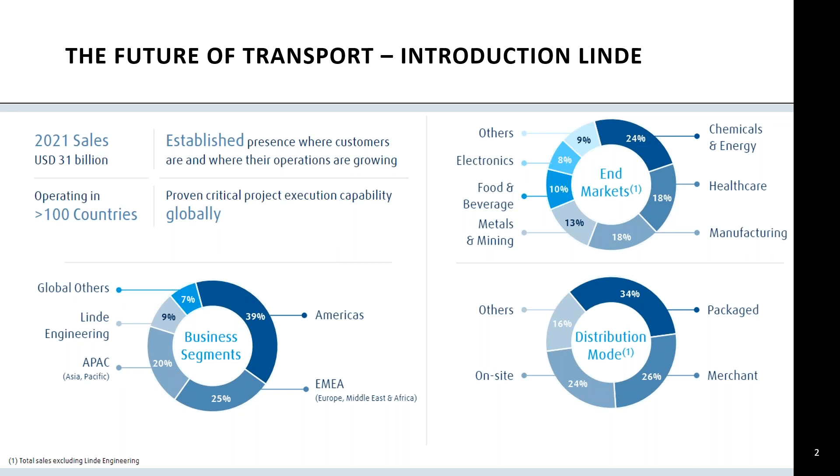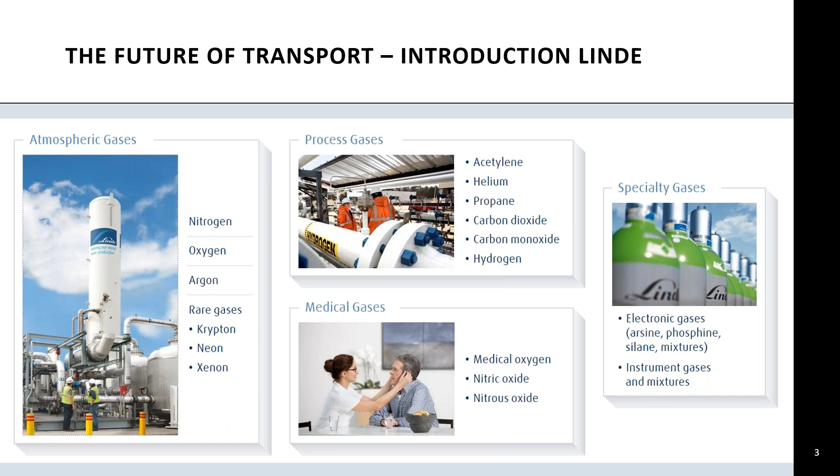Good morning, everyone. Very fast introduction for Nitrex. Nitrex really started as a company specialized in automation technology, mostly creating control systems.

Today, the company has evolved. It has three main divisions. The first is called HTS, a commercial heat treating service with plants located worldwide, including the US, Mexico, Brazil, China, and parts of Europe. Then you have the main core of the company, called NTS, specialized in heat treating technology and equipment. This part builds control systems and furnaces, including nitrocarburizing furnaces, nitriding furnaces, and vacuum furnaces, with an emphasis on providing recipes and technological help and support to our customers.

Finally, there is the instrumentation branch of the company called UPC Marathon today, which specializes in OEM supplies, including flow meters, oxygen probes for carburizing, gas analyzers for nitriding and other applications, gas mixers, gas generation, as well as automation software for applications such as lights-out plants.

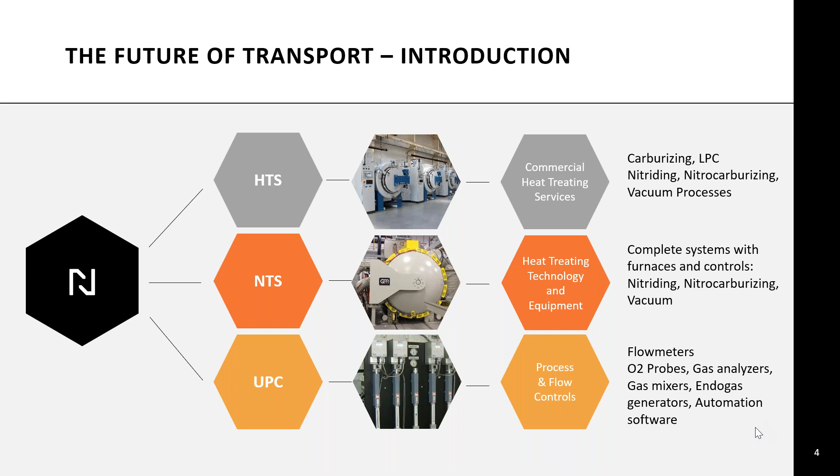The section that Linde will talk about is the other processes beyond heat treatment, and this applies mainly to electric vehicles and the change in the industry.

Finally, I will talk about particle emission reduction, a case that is something brand new and has surged in the past few years. I'll expand on this later. It's one of the great case studies that illustrates how the industry is changing today. And finally, Linde will talk about the need for precise gas process control and high quality gases in heat treatment and other industries.

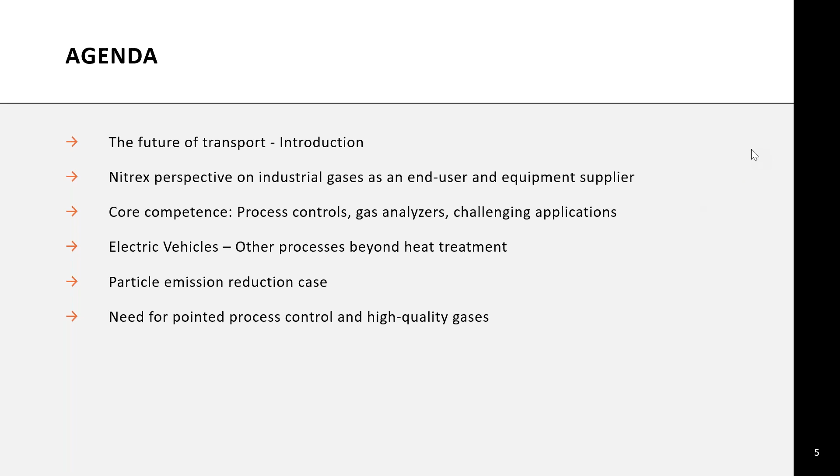So you've probably seen, in the business of heat treatment or transportation, that in recent years internal combustion engines have had a rougher time and have been eliminated, or will be eliminated in some parts of the world, including Europe, by probably 2030. We always think this will eliminate some of the processes. It definitely will, but there are also many new opportunities rising with the transportation industry evolution.

So there are two key trends: electrification and connectivity. Connectivity has more to do with smart cars, self-driving systems, and so on, and these apply to different forms of transportation. But electrification is one of the main factors we are seeing as a heat treater and gas supplier.

What is driving those trends is mainly policy changes, which have to do with the reduction of pollution and impact on our environment, mostly driven by meetings such as COP, which has just taken place, and different new legislations covering Europe as well as North America.

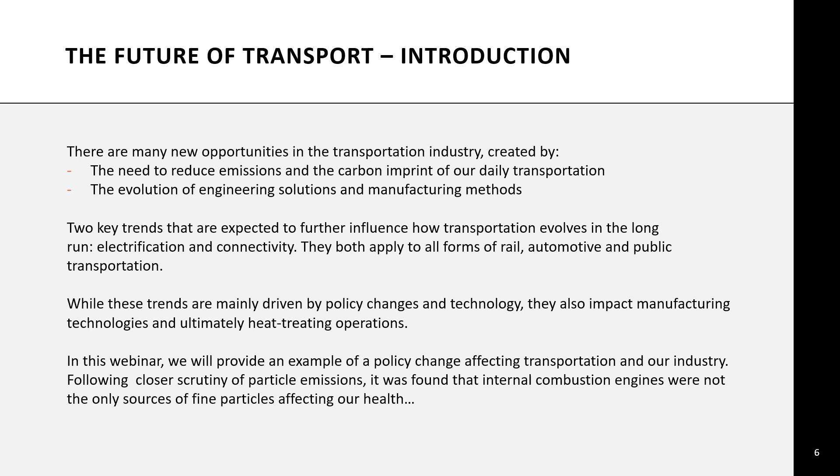I'll describe very shortly and succinctly our perspective on industrial gases as an end user and equipment supplier.

So it's a bit misleading when we talk about heat treating in general. Most of the processes are not really just heat treating processes. High value added processes are usually better described as thermochemical processes. This applies to nitriding and nitrocarburizing, as well as carburizing and low pressure carburizing. Finally, in vacuum heat treatment, yes, you do have classical heat treatment, but also other coatings being applied. So it's really a vast world that has to do with, yes, heat treatment, but also thermochemical treatments.

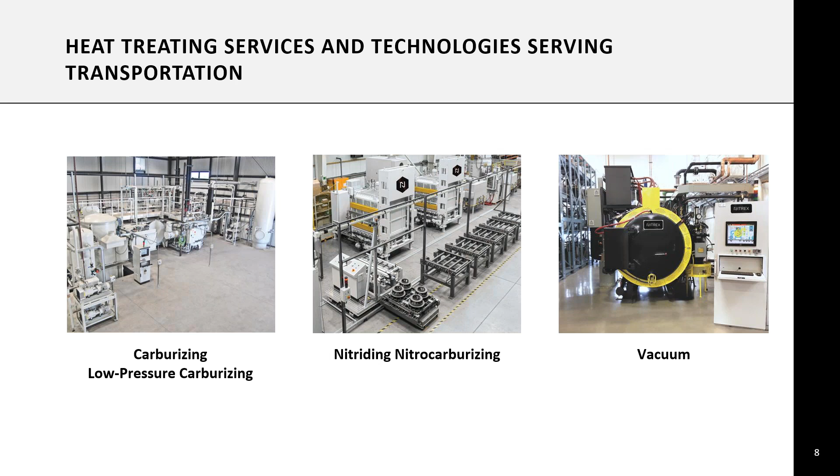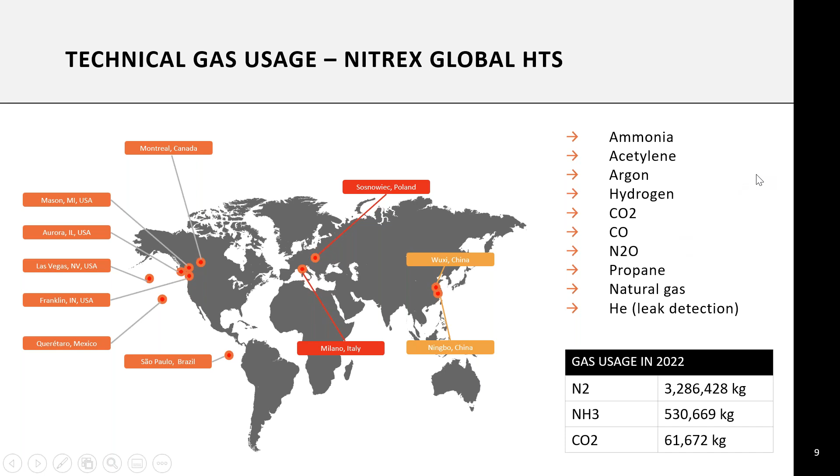What we have seen in the most recent evolution in the transportation industry has a huge impact on demand. One of the factors driving this demand is new changes in purchasing patterns and the replacement of combustion vehicles by electric or hybrid vehicles, which have basically the same needs.

Nitrocarburizing is used a lot for components such as brake components and chassis components, because it's a process specialized in sliding wear and anti-corrosion, among others. So the volumes have been increasing, which calls for completely different solutions. Most nitrocarburizing processes are relatively short, lasting between less than 3 hours and perhaps over 6 hours. This means big pit furnaces are not very practical, because your heating and cooling time requires a long time due to the volume and weight, while the process itself is relatively short. Therefore, we are evolving towards equipment which is either continuous or semi-continuous to provide solutions for this kind of demand.

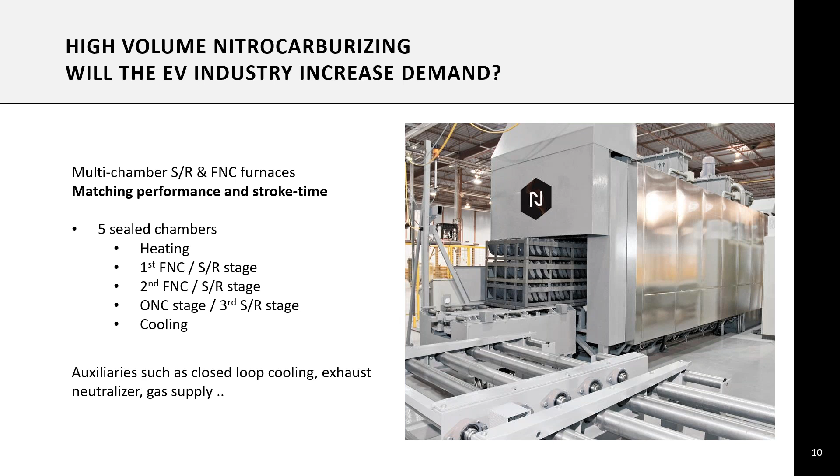The other aspect of our business is also heat treatment of aircraft engine parts. So it is an evolution. We are thinking, of course, of evolving vehicles such as electric cars and so on, but it is very surprising that new engines, those turbofans we are seeing right now, with the improvements in the blades and the types of compression they can achieve, have an extremely good mileage. If we go to the next slide, we'll see some of the components.

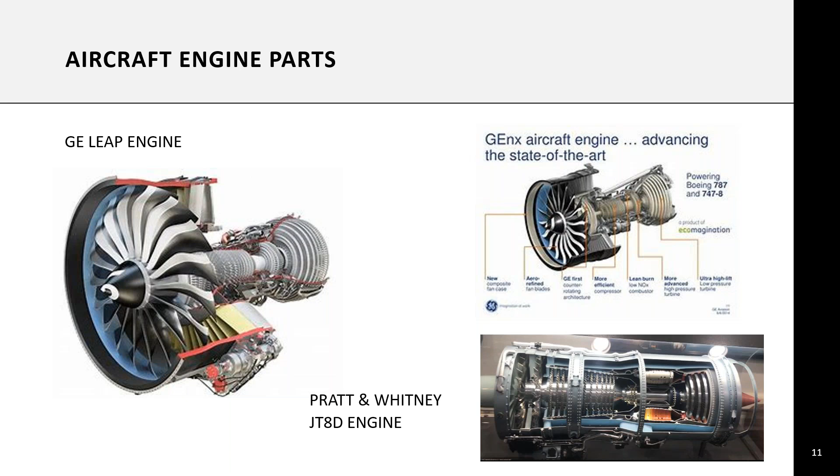Those are called single crystal blades and vanes, and they are used in the hot part of the engine. The cold part that we see as passengers on an airplane is usually a composite with the leading edge made with materials such as titanium. But inside the engine, you have this type of vanes and blades, which allow higher compression ratios and very hard working environments. The processes used are usually vaporized aluminide coatings. This is used also in military airplanes.

As a passenger taking an airplane, you have a carbon signature. Newer engines have an extremely low carbon signature. Of course it's the quantity of flights that counts, but as a passenger you get roughly 90 miles per gallon. This is astounding when you think of the sheer quantity of fuel being used in aviation. Those engines allow lower and lower fuel usage and lesser pollution.

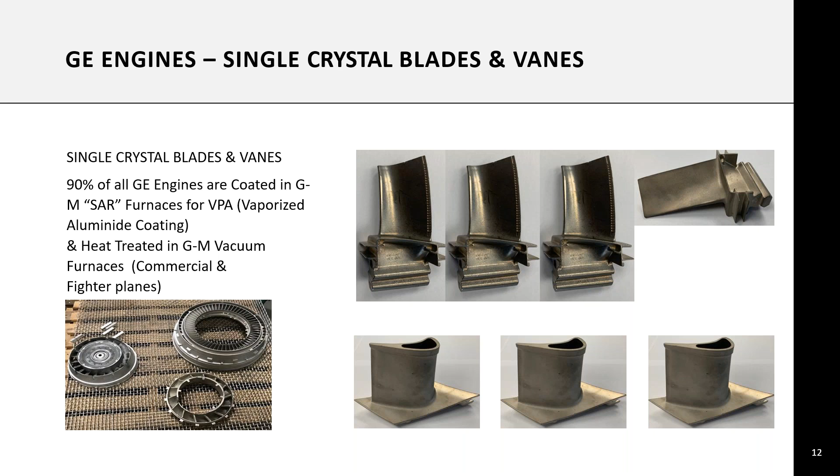The main gases used in vacuum applications are nitrogen, argon, and hydrogen.

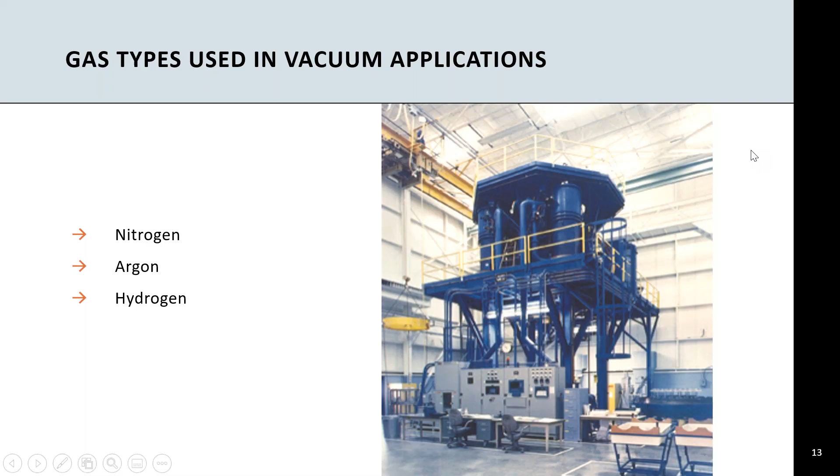So we are coming to LPC. LPC is a newer, leaner, and probably less polluting way of carburizing components. Electric vehicles have relatively simpler or different gearboxes from classical vehicles, whether manual, automatic, or semi-automatic. In this case, you have many solutions—when you look at different manufacturers, everyone has his own. But LPC technology really provides a better environment to operate. It's more precise, it is less polluting, and even though the equipment itself may be very expensive at the beginning, the operating cost and pollution generated by the equipment are worth it. I believe Carl can elaborate a bit more on this process.

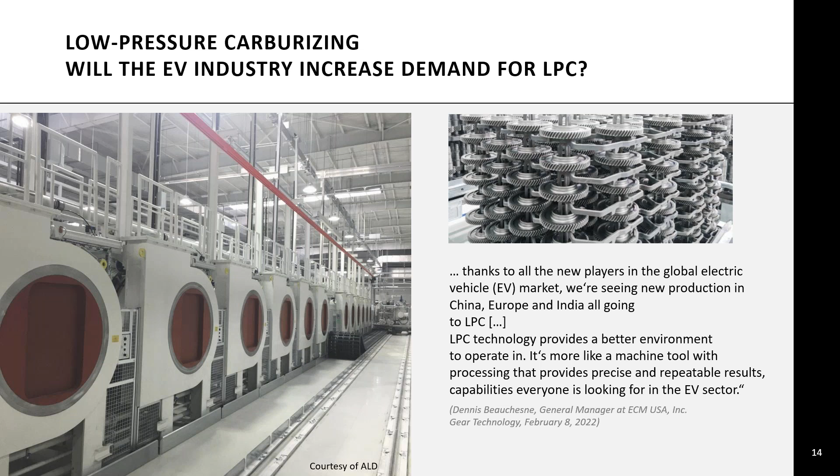Low pressure carburizing, compared to conventional carburizing, allows operators to increase their temperatures and shorten total process times, similar to what Jack mentioned about nitrocarburizing as well. In combination with high pressure gas quenching, the solution minimizes distortions compared to normal oil quenching. It ensures consistent cooling results with respect to grain structure and hardness. In low pressure carburizing, the optimal selection of gas purity is also important for achieving that outcome.

The use of acetylene as a carburizing medium has specific advantages as well. With acetylene, the density of the loads is increased, as well as the length-to-diameter ratio of blind holes. So you can actually get carburizing a little bit further up into blind holes, such as ring gears and similar mounting hardware. Ensuring the right flow conditions and supporting intermittent flows, both low and high pressure, is especially critical when several treatment chambers are present, similar to the image here. To the right, it gives a quick description of the process itself and the gases we use: nitrogen to purge the furnace, acetylene for the carburizing, and then helium for the quenching.

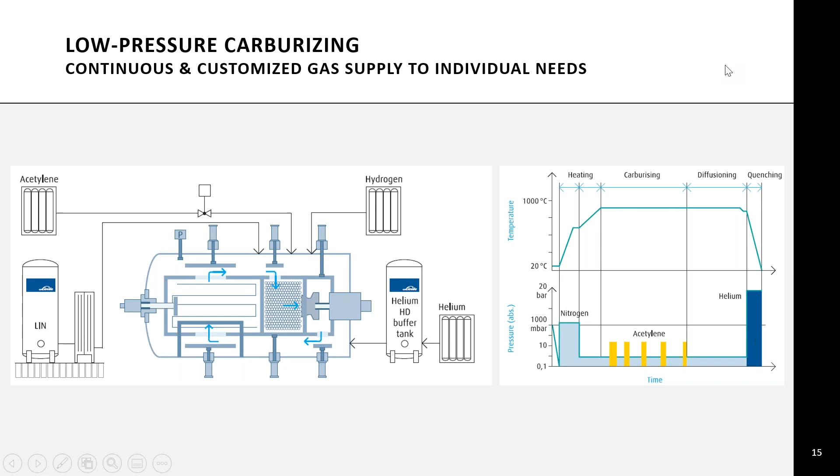Next, I wanted to talk about an additional step with heat treatment: sub-zero treatment. Currently, with trends towards more vacuum heat treatment, there's increased demand for sub-zero processing in order to transform retained austenite to martensite.

In the image here, it shows an example of one of our sub-zero treatment coolers. Another reason to bring it up is the possibility for more shrink fit connections due to increasing demand within the electric vehicle market.

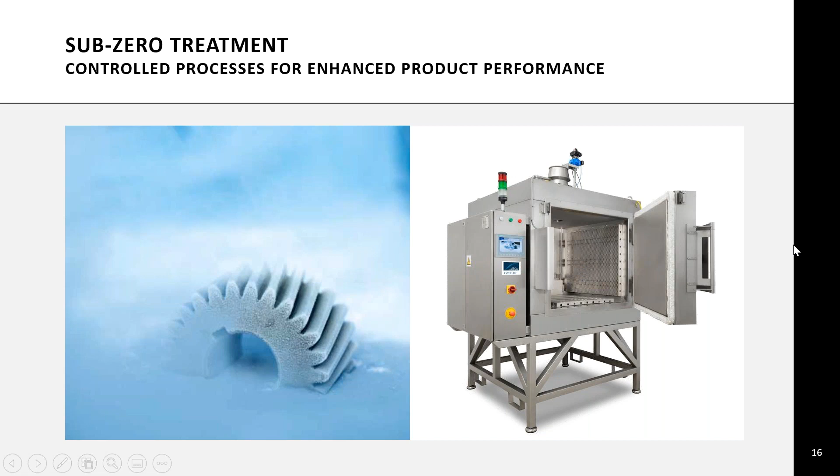As an isolated cryogenic step, special freezers can easily be integrated into manufacturers' existing heat treatment processes, typically working at temperatures ranging from -60C to -180C. These treatments take between 4 and 72 hours, depending on the goal of the process.

The transformation of retained austenite to martensite can be achieved at a range between -60C and -120C, with a dwell time of about 1 to 4 hours depending on the cross-section of the materials. Applying cooler temperatures between -120 and -180 with longer dwell times will also support precipitation of fine carbides, with improved wear resistance to metal parts.

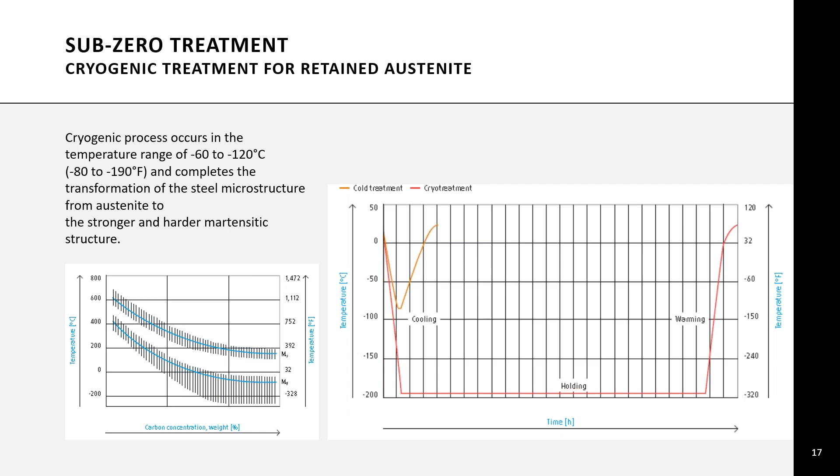Thank you very much, Carl. This section really talks about our core competence. We can go to the next slide, please.

So I mentioned at the beginning that Nitrex does specialize, and did specialize at the beginning, in research, and the company still invests and reinvests a portion of its revenue in research and development. Why? Because we have new applications and new challenges coming from all kinds of industries, including new requirements in the automotive sector as well as aerospace. We have about 150 engineers in different specialties who are either working at Nitrex, contracted, or working together with us at different universities on new processes and new solutions.

Next, please. Thank you. So among the Nitrex technologies, the first one that came up was potential controlled nitriding, formulated at the very beginning of the company as a new automated and controlled system with a closed loop control that analyzes gases, quantifies the reaction occurring inside the furnace, and allows for precise nitriding and renitriding with the same results from one process to the next, regardless of the number of components inside the furnace or the developed area.

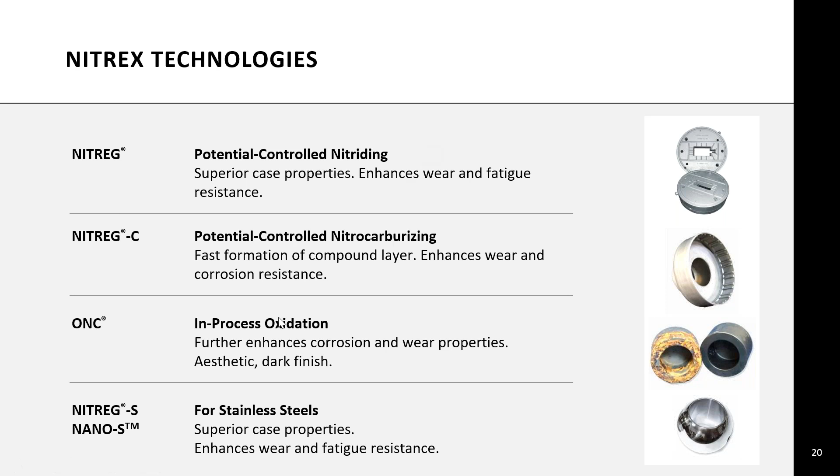Next, please. Thank you. So here, out of this research, which is really our core competence, have come two main specifications which are today industry standards. One is 2759/10, automated gas nitriding controlled by nitriding potential, which is one step after 2759/6, which was basically describing control by dissociation. And then you have 2759/12, which talks about gas nitrocarburizing automatically controlled by potentials.

It's not a typo. In this case we have two potentials: one is nitriding potential, and the second is the carburizing potential. So you have a Kn and a Kc that are being controlled together in order to achieve the right white layer composition in terms of gamma prime and epsilon.

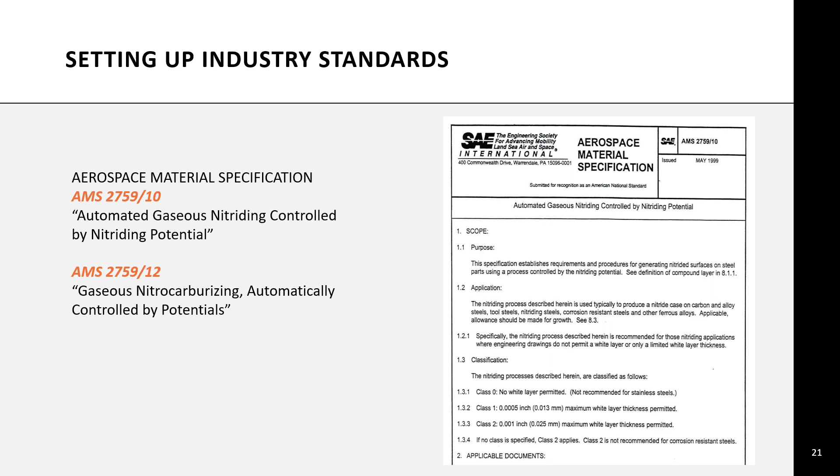Next, please. Thank you. So this is the UPC marathon section derived from this research. We have our division which supplies many of our customers, providing upgrades and so on. It specializes in carburizing controls, endo generators, process automation, flow control, as well as oxygen probes and full solutions for replacement of all their equipment. It is part of Nitrex, however a different division, since it provides solutions for equipment not necessarily built by Nitrex.

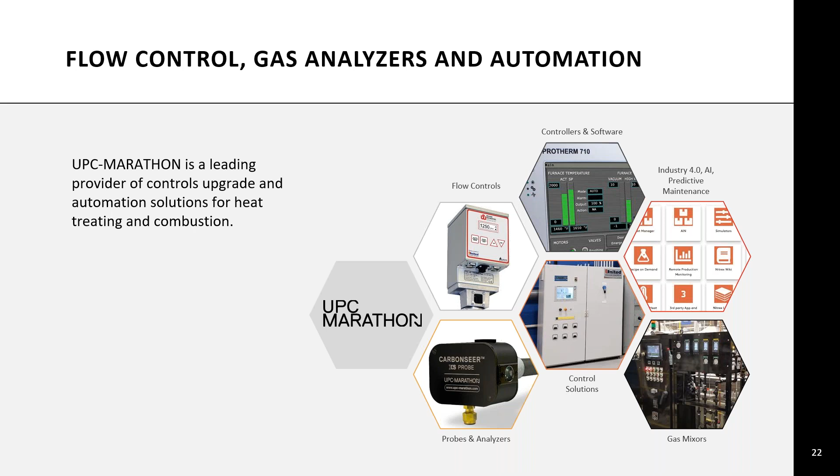Next, please. To summarize the materials we cover in terms of nitriding and nitrocarburizing: carbon steels, mostly nitrocarburizing; low alloy steels, here 4140, 4340, very common, which we also process in nitrocarburizing if we have an annealed form in our plants; tool steels, most common are H11, H13. H13 can also be nitrocarburized for some applications.

High-speed steels, which is M50 for instance, in this case there aren't many applications. One of them in transportation is bearing races built by certain companies, which are nitrided to a relatively great case depth and treated by Nitrex using our recipes. You have nitralloys, comprising Nitralloy 135M and N, and then a whole range of stainless steels. Next, please.

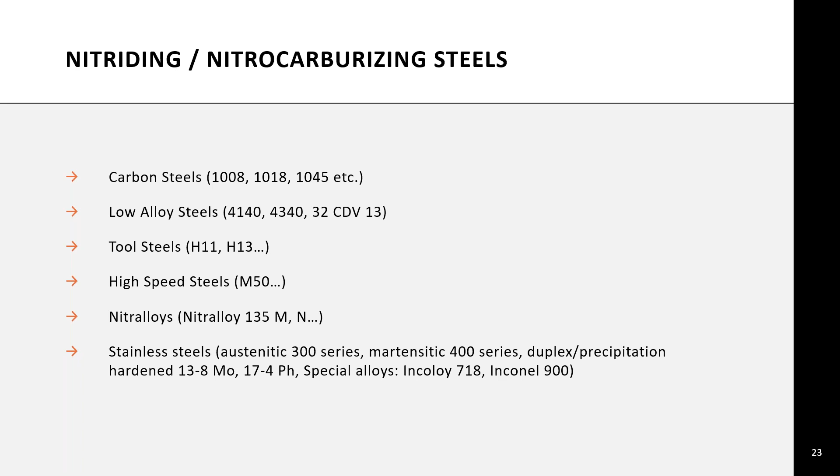Thank you. This is your turn.

This brings us to other processes beyond heat treatment, looking into the future of transport. There are other industries and processes that play an important role in our topic. One is additive manufacturing, also known as 3D printing or rapid prototyping, the process of joining materials to make objects from 3D model data, usually layer upon layer, as opposed to subtractive manufacturing.

The use of additive manufacturing with powder metals is a fast-growing industry sector. It has become a suitable process to produce complex metal parts, not only used for prototypes anymore. As a matter of fact, in 2021, 28% of all additive manufacturing systems were sold into the transportation industry as well.

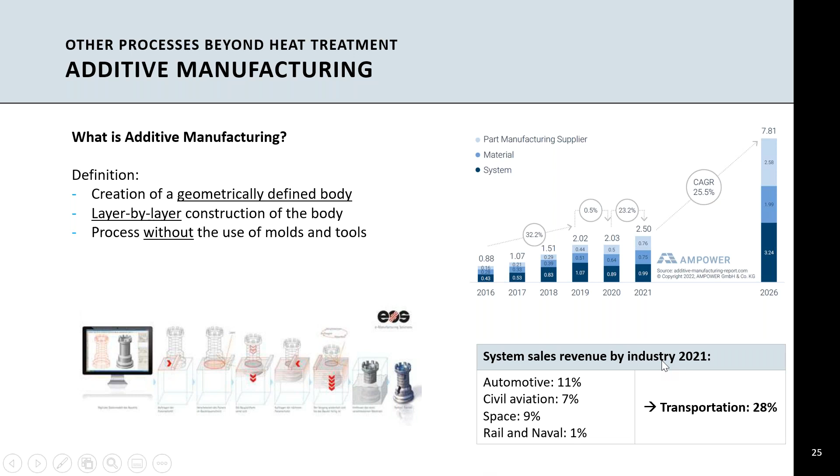One of the parts that Linde has been working closely with some manufacturers on is metal powder, and it plays an important role in the additive manufacturing process. The quality of the metal powder used will have major influences on the properties, but it can also influence build-to-build consistencies, the repeatability of the additive manufacturing machines, the production of defect-free components, and defects on the surface as well.

So if you see here in the image, you have water atomized powder as well as gas atomized powder, and what they're best used for. Gas atomized powder is easier to flow, with low oxygen content, whereas water atomized powder is non-spherical, with bad flowability. It tends to clog up easier, as well as grab hold of chemical contaminants.

Powders for additive manufacturing are usually produced using the gas atomization process, where molten metal's stream is atomized thanks to high pressure neutral gas jets into small metal droplets, thus forming metal powder particles after rapid solidification. Gas atomization is a physical method, as opposed to a chemical or mechanical means, to obtain those metal powders.

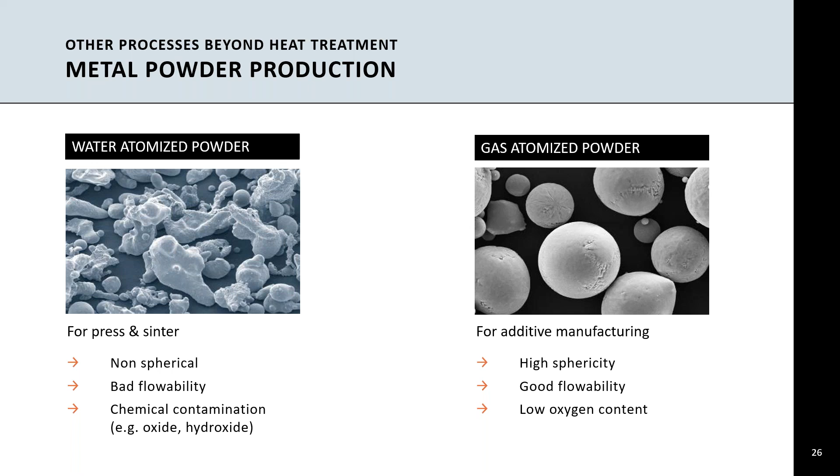But powders produced by gas atomization have a spherical shape, like you see in the image to the right, which is very beneficial for flowability, again repeating what I already mentioned.

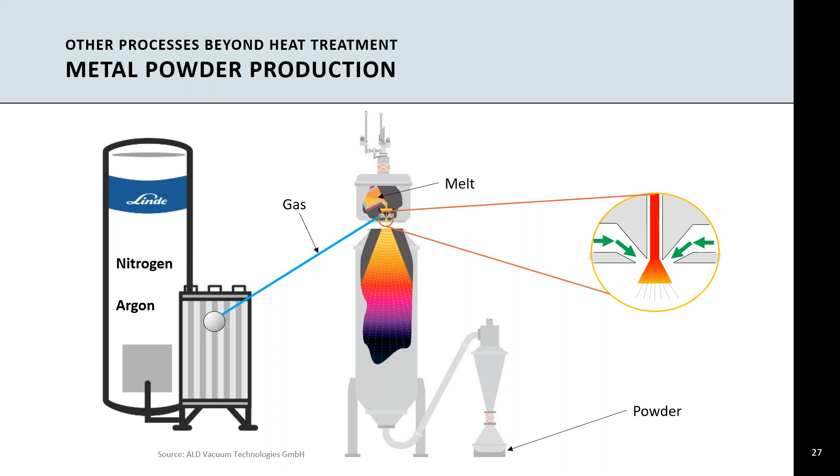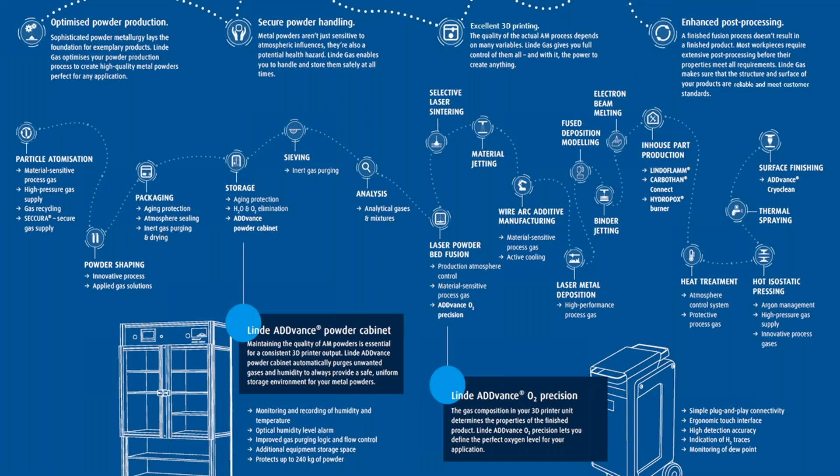As demand for the additive manufacturing process has been steadily increasing, so have the many enabling technologies: laser metal fusion, laser metal deposition, selective laser sintering, wire arc additive manufacturing, thermal spraying, and electron beam melting. Products manufactured with these processes and technologies are typically forged, heat treated, or sintered to achieve the quality, finish, and mechanical properties desired. Process gases play a vital role in every step of the AM fabrication chain.

Laser metal deposition is a process in which a high power laser beam is connected to a robot or a gantry system to form a melt pool in a metallic substrate, into which powder or metal wire is fed.

We supply customers with gaseous or liquid helium, argon, and nitrogen systems to assist with the laser metal deposition process. It's similar to welding in that you still need a shield gas to protect the powder as it's being formed.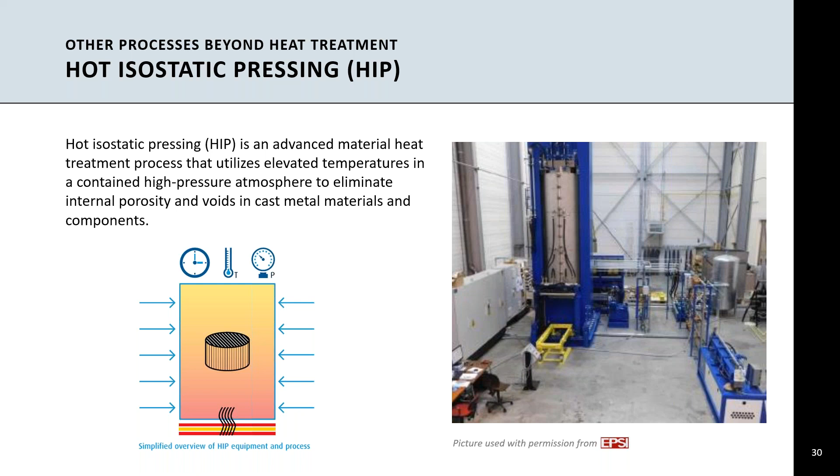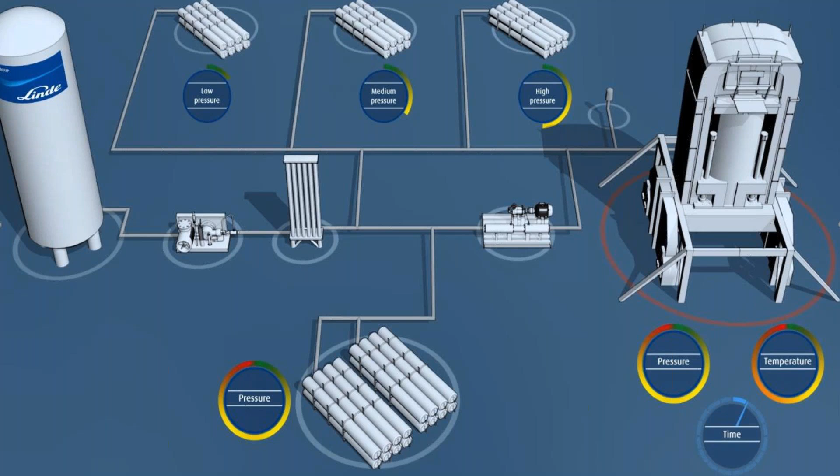With HIP, depending on the size of the pressure vessel, there can be tremendous amounts of argon or nitrogen used. Linde has actually developed processes to reuse that argon after it's been used, and this is an example of that.

Looking at all of these processes and the prediction of sales moving into the future of electric cars, we're looking at an approach of somewhere between 50 million and 60 million cars by 2040, internationally.

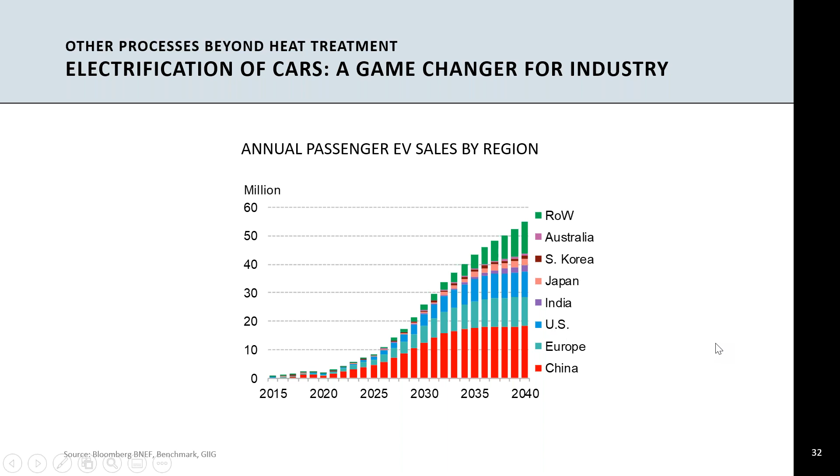We also touch on the new booming industry of battery cells. Figures on this slide show impressive growth expectations, taken from a few weeks ago in March. Looking back, they were actually looking at 282 individual lithium ion battery gigafactories in the pipeline to be made, with a total capacity of roughly 5,777 gigawatt hours. So it's an increasingly booming industry.

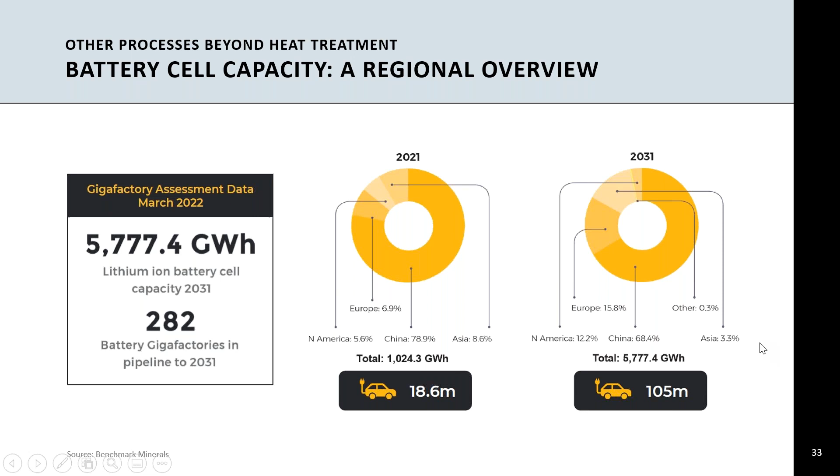Although the production of batteries does not include classical heat treatment processes, we also do some aspects that could have influence on the heat treating industry as well. There are different types of materials that may require heat treatment. There are processes like lithium roasting that could benefit from classical heat treatment know-how. We see key players from the heat treatment industry active in the lithium ion battery industry, particularly for anodes and cathodes. There's some efficiency that can be gained through a heat treatment process.

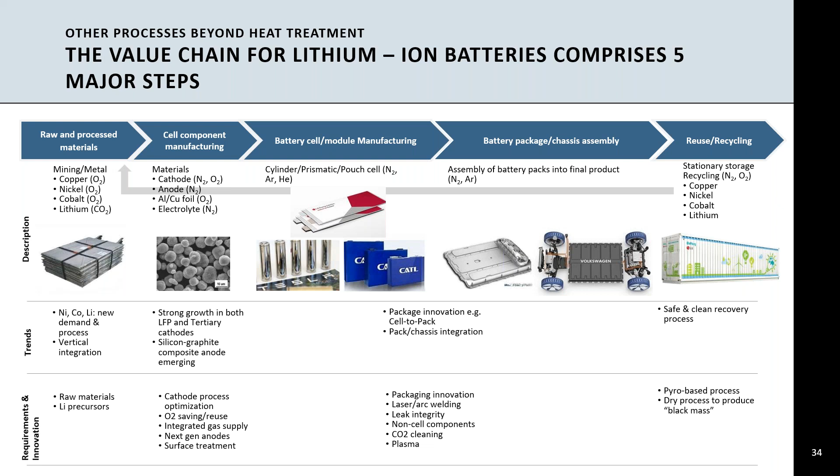Jack? Thank you very much, I will try to go faster. I think we're getting near the end of our time slot.

So we'll go very fast over this interesting reduction of emissions case. Probably it's what we used to call Dieselgate, still fresh on your minds. Following scrutiny of diesel and internal combustion engines and their emissions, it was found that when starting to analyze what really pollutes the air in big cities and next to highways, those combustion engines are not the only ones polluting. Up to 30%, actually more than 30%, of all pollution comes from different sources. One of them is tires wearing out. The other is the amount of particles coming from brakes.

So there is a new legislation, probably right now on the books and will be issued very soon, or has been issued in November, called Euro 7 emission standards. It calls for many things, among them the elimination of copper from brakes, because it's one of the elements we were breathing. But if we go to the next slide,

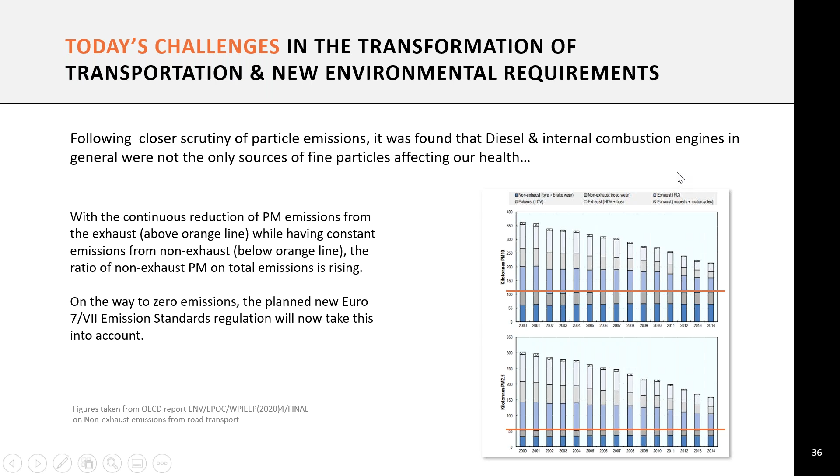we'll see that sources such as the discs themselves are a very significant source of pollution. Why? Discs are normally made from cast iron, and they tend to abrade the pads. Discs do not behave the same as they age and as they rust. One of the key aspects in the recent evolution of vehicles towards electric vehicles is the regeneration, electrical regeneration used instead of classical braking. When you regenerate power and let the car regenerate instead of using your brakes, you use the brakes less, and brakes tend to rust.

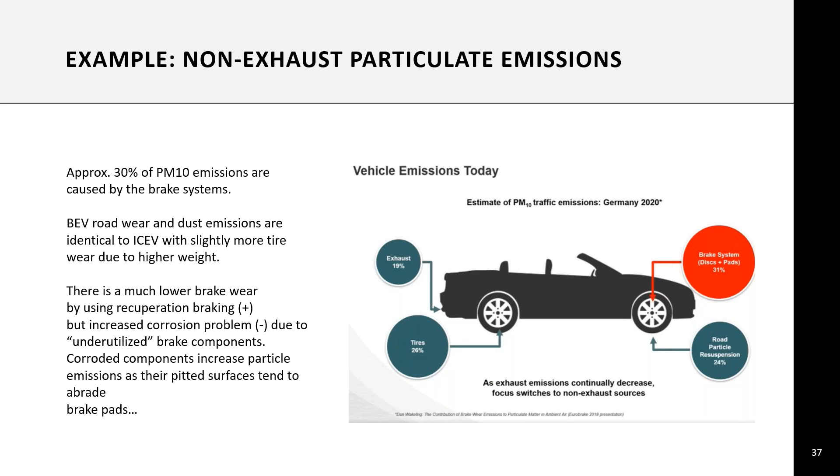Next slide, please. So there are many ways of reducing impact on particle emissions. One of them is carbon ceramics, but this is extremely expensive and used only on very top of the class cars, most of them German. There is a coating process we can use also on standard brake discs, which is less expensive but not fully efficient. And it was discovered that ferritic nitrocarburizing on standard cast iron brake rotors works extremely well.

It has been used in North America for the last 10 years or so for different reasons. People did not want rusty discs in front of their dealer. Let's say the dealer has them outside, and customers can see that a car that has not been used for several weeks already has very rusty discs. It was not appealing commercially, and when introduced, nitrocarburizing also reduced the amount of recalls during the warranty period. Next slide, please.

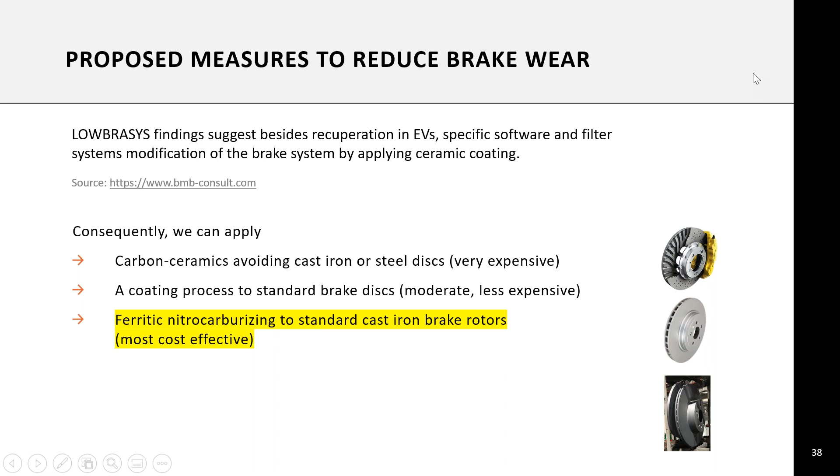Thank you. So how does ferritic nitrocarburizing actually work? In essence, what you see in that small table, the layer diagram, is that you build on top of, say, carbon steel or cast iron, a white layer. White layer is a quasi-ceramic layer which can take up to 10% nitrogen volume, the rest being iron or alloying elements. The interest is that it has low conductivity, which makes it interesting for corrosion resistance, and it also resists wear because it is extremely hard.

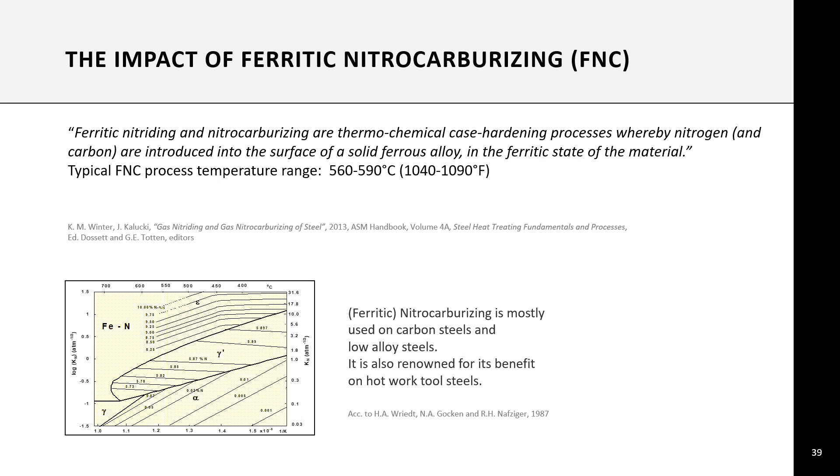Next, please. Thank you. So this is the composition, and we'll be looking more at carbon steels and cast irons. Why? Because cast irons and carbon steels do not become extremely hard, they don't produce extremely hard cases because they don't have the same amount of alloying elements as, let's say, low alloy or tool steels. But the point of interest here is that the amount of nitrogen which is diffused or forms the white layer on the surface prevents corrosion and prevents pitting. Pitting, even if moderate, can grate discs, causing discs to grate the braking pads and emit a large quantity of particles. Next, please.

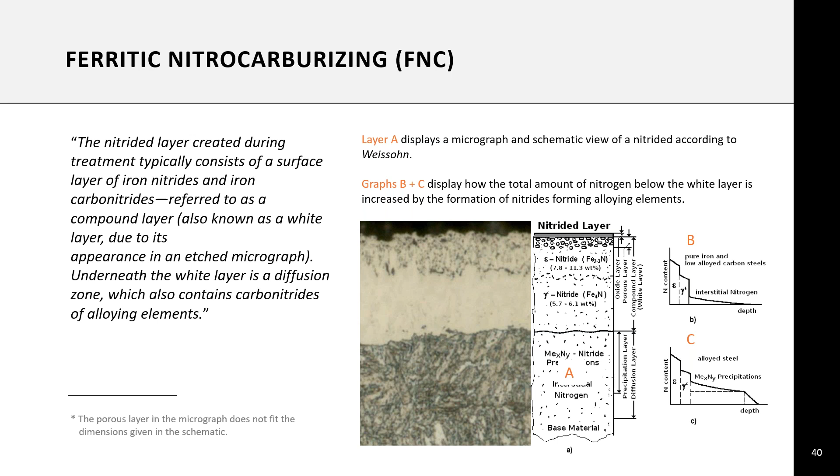And you have this compound layer, which is also the white layer - they are the same. Many people prefer to use the term white layer. Compound comes from the fact that it has two theoretical components, gamma prime and epsilon.

On top of this compound layer, or white layer, you build a layer of oxide called Fe3O4, basically magnetite. It is a compact oxide which prevents corrosion. It may be very thin and may wear out relatively fast, however it prevents discs from corrosion onset and helps maintain the quality of the disc during its whole lifetime.

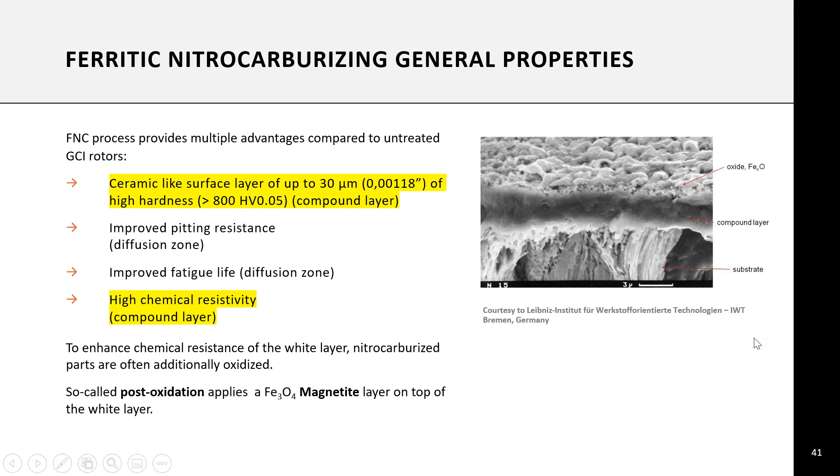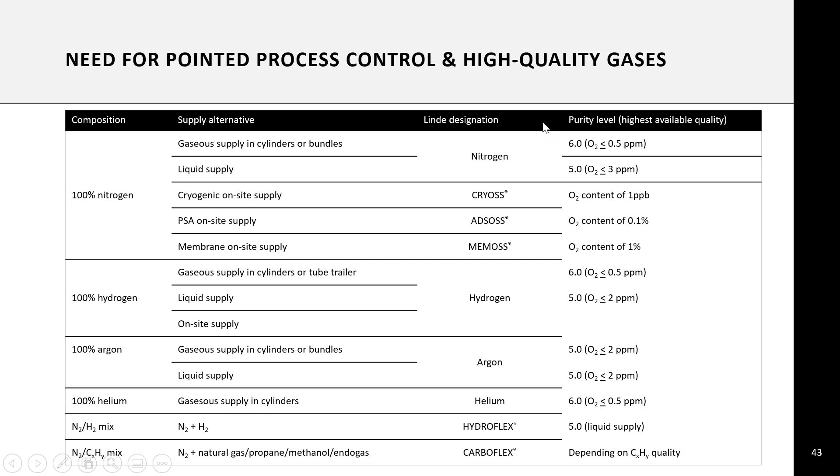Okay, this brings us to the point of process control and high quality gases. This next slide shows the composition of gases used for heat treatment, the supply modes that Linde can provide - from gas cylinders up to on-site production of each gas - as well as their purity levels on the right-hand side, and Linde designations for each.

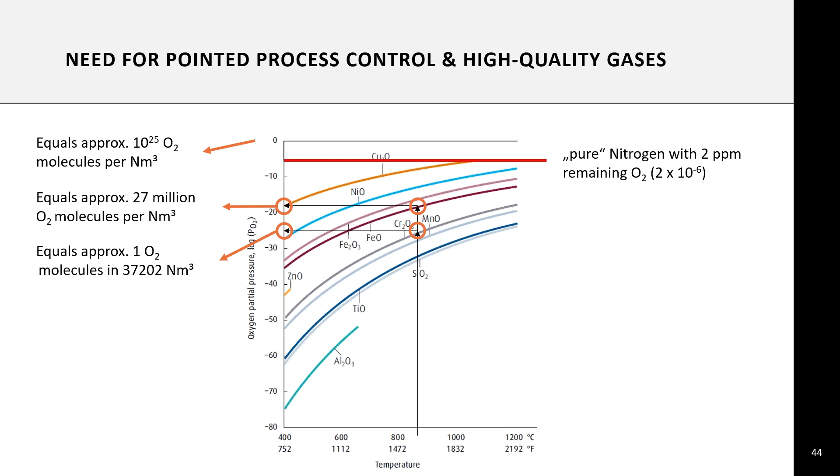However, in general, as you may have seen, the evolution of transportation, in particular automotive and land transportation, away from internal combustion engines towards electrification is not the end of the heat treating industry - it is just a transformation. It has allowed, of course, a reduction in carbon footprint, but also has posed new challenges.

One of them we have seen is the issue with brakes and the pollution we were generating, which probably most of us were not aware of.

We are also looking for new ways to manufacture parts or heat treat them in high volume. This includes nitrocarburizing and also LPC, low pressure carburizing, which allow the use of less gas, more precise treatment, and manufacturing anything from gearboxes to brakes on the new generation of vehicles we'll be seeing, or are already seeing, in large quantity on the market.